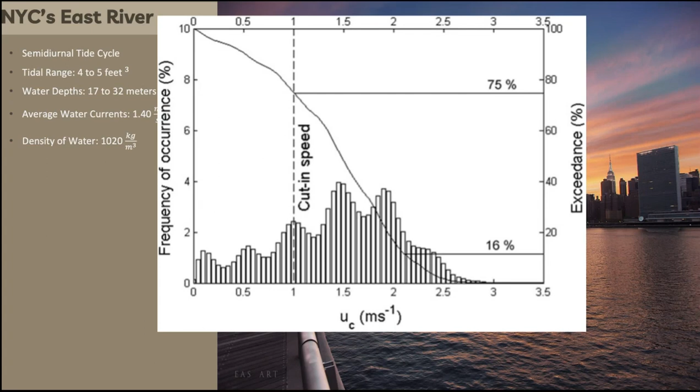The purpose of this project was to design a horizontal axis marine turbine that can operate in New York City's East River while providing sufficient power to the residents on Roosevelt Island. Roosevelt Island is a 1.5-mile long and 1/8 mile wide island that is part of the borough of Manhattan. The island has an average population of 11,722 and a total area of 147 acres.

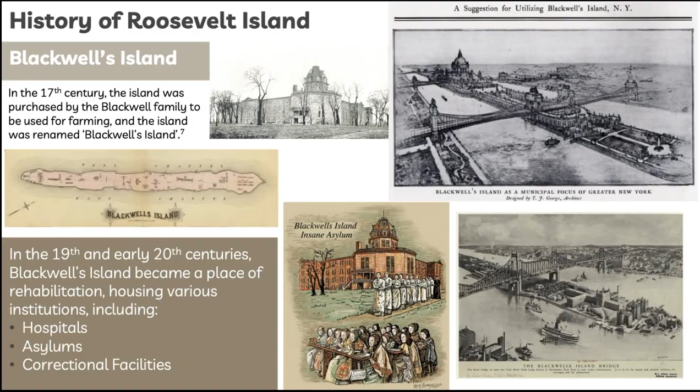In 1971, the island was renamed Roosevelt Island in honor of President Franklin D. Roosevelt. This was all part of a larger plan to revitalize the island and to improve its image. The plan was to start distancing the island from its earlier associations with institutions like prisons and asylums.

The plan included provisions for housing, parks, transportation, and infrastructure. One of the primary goals of the revitalization plan was to create a mixed-income residential community on the island by constructing new apartment buildings and renovating existing structures to accommodate a diverse population. Overall, the revitalization plan aimed to create a more livable and sustainable community for its residents.

Roosevelt Island's history is considered a place of care and rehabilitation, which is reflected in the architecturally significant landmarks still located on Roosevelt Island today. Roosevelt Island today contains a mixture of residential, commercial, institutional, and greenery spaces, and it is home to a diverse community of residents, including families, students, and professionals.

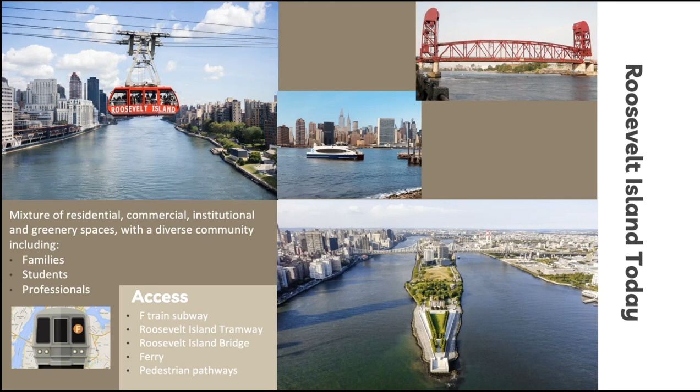The island is accessible via the F-Train subway, the Roosevelt Island Tramway, the Roosevelt Island Bridge, ferries, or pedestrian pathways for walking and biking. Con Edison is the current and dominant electric utility company that provides power to all 5 boroughs in New York City. Only about half of New York City's electricity is provided from outside of the city, and the remaining must be provided within the 5 boroughs.

New York City currently relies on 24 in-city power plants that run on natural gas or fuel oil, with the majority of them having been built over 40 to 50 years ago. Since the average Manhattan resident uses about 600 kilowatt hours of electricity per month, and the average population on Roosevelt Island is 11,722, the average monthly electricity usage on Roosevelt Island was assumed to be around 7,000 megawatt hours per month.

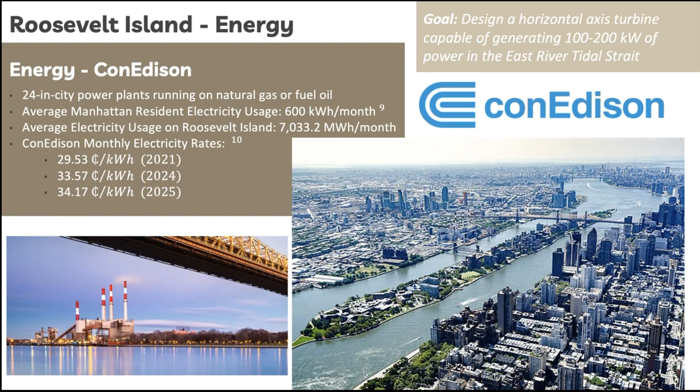Con Edison's average monthly electricity rate for a New York City resident was determined to be 29.53 cents per kilowatt hour in 2021, currently 33.57 cents per kilowatt hour in 2024, and it is projected to be 34.17 cents per kilowatt hour in 2025. The goal for these projects was to design a horizontal axis turbine capable of generating 100 to 200 kilowatts of power in the East River tidal strait.

Verdant Power is a marine renewable energy company that developed the first tidal energy project in the United States off of Roosevelt Island in New York City's East River. The Roosevelt Island Tidal Energy Project, or the RITE Project, was implemented in multiple phases, each of which involved the deployment of additional turbines and infrastructure, which allowed for incremental testing and optimization of the tidal energy system.

The project conducted multiple assessments to study the tidal currents and to measure water levels, current speeds, tidal patterns, and the effects on the environment. The results from these tests were very helpful when designing the turbine system for this course. In their final phase, Verdant developed an improved version of the turbines to be used at the project site, which are shown in the pictures on the screen.

The turbines were the 5th generation free flow kinetic hydropower system, or Gen 5 FFS, which were designed with the goal of extending service life, minimizing on-water maintenance work, and to reduce assembly and maintenance costs. The turbines had a rotor diameter of 16.4 feet, with 3 blades rotating at approximately 40 RPM. Verdant's turbines were also capable of switching direction with the current, rotating so that they can generate maximum power no matter which direction the river is flowing.

The Verdant tri-frame mounting system is a single triangular frame mount that supports 3 turbines at once onto the riverbed and requires no civil works on the riverbed. The mount was designed to simplify the deployment and retrieval process during installation and maintenance, which allowed for the reduction in timeline and costs. The RITE project operated for 9 months, and as of December 2021, Verdant Power's RITE project was no longer in operation, as the project license expired and the system was decommissioned and all infrastructure was removed.

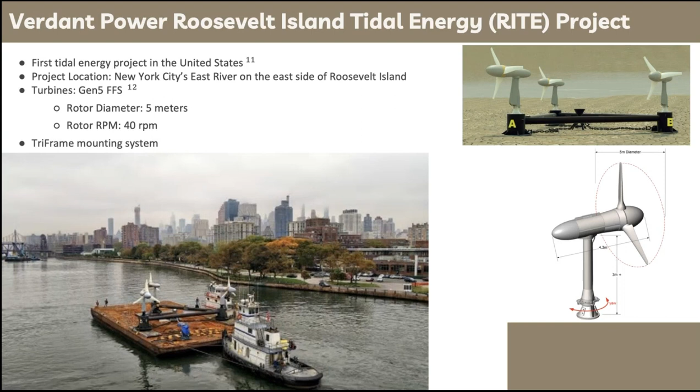The goal for this course focused on the optimization of the previous RITE project. The RITE project and its tidal energy system were considered as the starting point for this overall course project and was an extremely beneficial reference for this course.

The turbine design for this course had a rotor diameter of 8.4 meters and a blade cross-section utilizing the NACA 4415 airfoil. The dual rotor turbine utilized a 2-bladed rotor and was designed for a rated velocity of 2.5 meters per second and a rated power of 2 megawatts. The turbines would be installed on the west side of Roosevelt Island in the East River, with a minimum river depth of 17 meters and a hub height of 6 meters. Plots of chord and twist versus radial location are shown on the right side of the screen.

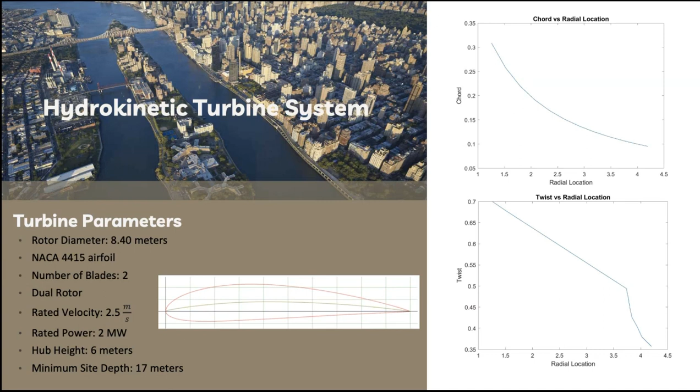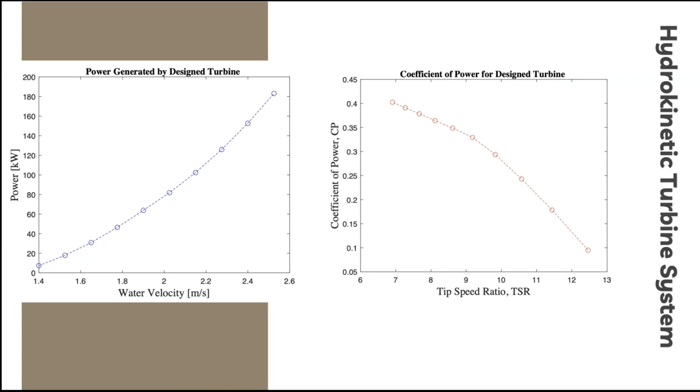This slide shows a plot of power generated by the design turbine versus water velocity in the East River on the left side of the screen, and a plot of the coefficient of power for the design turbine versus tip speed ratios on the right side of the screen. Here, this plot shows the power output for the design turbine, taking into account the water velocity variation per day in New York City's East River.

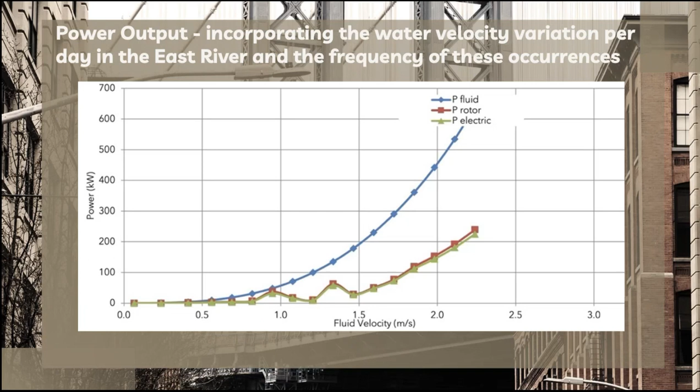The rated capacity for one turbine was 2 megawatts, with an annual power output of 387 megawatt hours per year, equivalent to powering 53 residents on Roosevelt Island. A hydrokinetic turbine farm utilizing 10 of the design turbines for a total rated capacity of 20 megawatts had an annual power output of 3,874 megawatt hours per year, equivalent to powering 538 residents on Roosevelt Island.

For reference, Verdant Power's tri-frame and 3 of their Gen 5 FFS turbines were installed in New York City's East River. The system had a total rated capacity of 210 kilowatts, or 70 kilowatts per turbine. The system was installed in the East River for approximately 9 months and was capable of generating 312 megawatt hours of electricity.

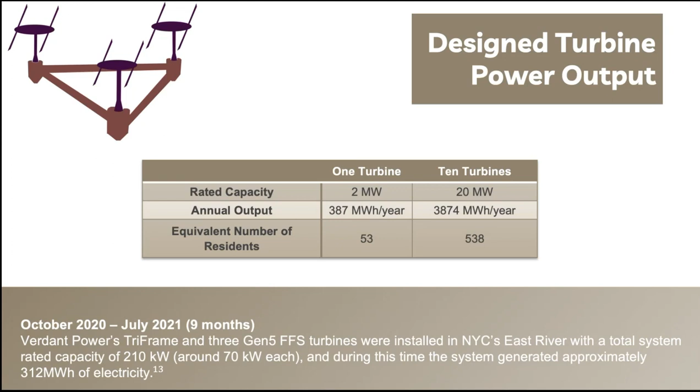As discussed in the previous slide, a hydrokinetic turbine farm utilizing 10 of the designed turbines produced an annual power output of 3,874 megawatt hours per year, equivalent to powering 538 residents on Roosevelt Island. The design turbine system will aim to provide power to the Octagon, which is an apartment building on Roosevelt Island. The building was originally the New York City Mental Health Asylum back when the island was known as Blackwell's Island. Later, the building was incorporated into the Metropolitan Hospital, which was then closed and abandoned in 1955.

The building was restored and renovated in 2006 as a lobby entrance for 2 adjacent apartment buildings on Roosevelt Island, now known as the Octagon. The Octagon has 500 units, which houses approximately 735 people. The design turbine farm would be capable of powering 73% of the residents in this apartment building, but since the building already has solar panels that are used to power a portion of the building, the design turbine farm could complete the power requirements for the Octagon apartment building.

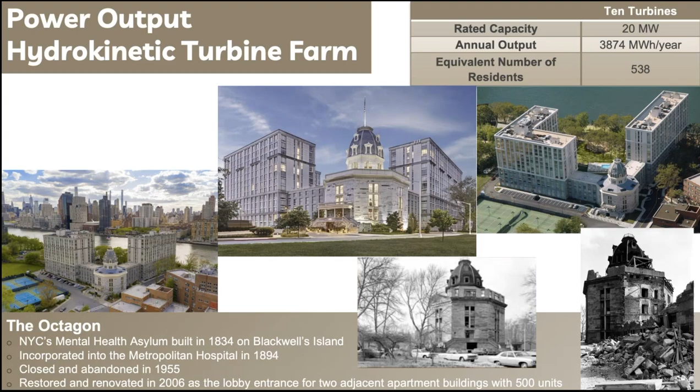Overall, New York City's East River is a viable location for a tidal energy project, as proved by the results of this project and the Verdant Power Roosevelt Island Tidal Energy Project, although there are still several disadvantages with tidal power production that need to be addressed before tidal energy can reach its full potential. The largest barrier to tidal energy is the high costs associated with constructing tidal power stations, including the costs of installing and maintaining the turbines and other infrastructure, and the high capital costs.

The mounting system for the hydrokinetic turbines utilized the Verdant tri-frame mount, which is capable of installing and retrieving 3 turbines and their mounting systems simultaneously. This helped to drastically decrease the costs associated with the entire turbine system. The system capital expenditure and the system operating expenses for operating 1 and 10 turbines is shown in the table on the screen. The system capital expenditure for 1 turbine was 693.6 cents per kilowatt hour in 2024 US dollars. The system capital expenditure for 10 turbines was 161.7 cents per kilowatt hour.

System operating expenses for 1 turbine was 486.4 cents per kilowatt hour, and for 10 turbines, it was 96.8 cents per kilowatt hour. The levelized cost of energy was determined to be 1,180 cents per kilowatt hour when designing for 1 turbine, and 259 cents per kilowatt hour when designing for a hydrokinetic turbine farm utilizing 10 of these designed turbines. Compared to Con Edison's standard electricity rate in Manhattan, which was 33.57 cents per kilowatt hour as of February 2024, the designed hydrokinetic turbine farm would increase the standard cost of energy for a typical Manhattan resident.

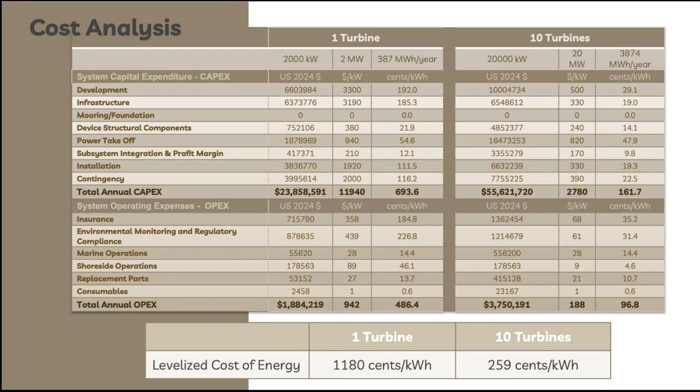When designing a tidal energy project, it is important to study the public policy issues, including costs and environmental effects of installing and operating tidal power systems, environmental concerns, and zoning requirements. One of the main concerns with tidal energy is the potential negative effects it can have on marine life. Construction activities may disturb marine ecosystems, and the noise generated by turbines creates a cause for concern, as this may negatively impact marine life, including fish and other marine mammals.

A major concern raised by environmentalists in response to tidal power is the effect on aquatic animals and plants. As turbines spin, it is a concern for fish and other sea life, as they could swim into the blades, which may potentially lead to serious injury or death. Since tidal power involves installing hydropower turbines underwater, there could also be issues with corrosion or biofouling, so it is important to carefully select the project site and the materials used.

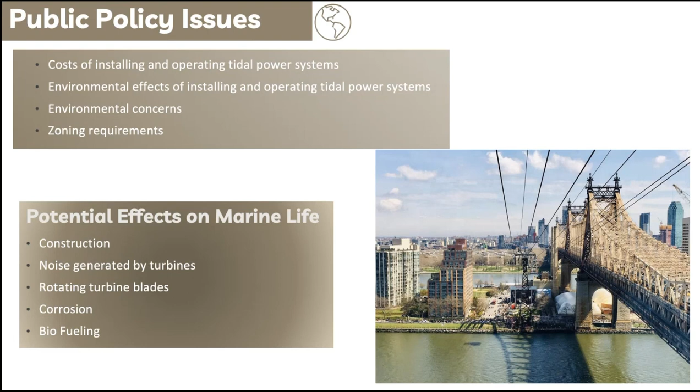The Army Corps of Engineers regulates activities in navigable waters and issues permits under Section 10 of the Rivers and Harbors Act and Section 404 of the Clean Water Act for structures, dredging, and fill activities associated with hydrokinetic projects. USACE evaluates permit applications to ensure compliance with environmental laws and regulations, including impacts on water quality, aquatic habitats, and navigation.

The National Oceanic and Atmospheric Administration's National Marine Fisheries Service and Office of National Marine Sanctuaries provide guidance on the potential impacts of hydrokinetic projects on marine species and habitats. They may issue permits under the Marine Mammal Protection Act and Endangered Species Act for activities that may affect protected species. The Environmental Protection Agency provides regulatory oversight of water quality standards and pollution control under the Clean Water Act, ensuring that hydrokinetic projects do not degrade water quality or harm aquatic ecosystems.

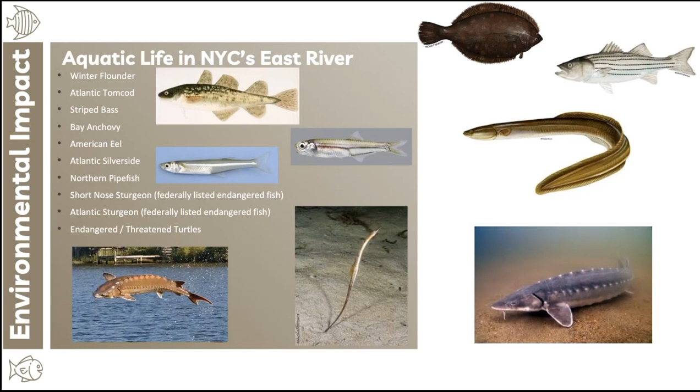As part of its first ever FERC pilot license approval process, Verdant Power passed a rigorous environmental impact assessment process. Through this, including the approval from over 20 renewable resource agencies and environmental groups, Verdant Power demonstrated that the rotation of their turbine blades did not affect fish, birds, or animals that swim in New York City's East River. Observations concluded that the majority of the aquatic fauna avoided the tidal power turbines during their assessment process.

Since 2006, Verdant Power has been analyzing the effects of installing a tidal powered turbine system in New York City's East River. The biological assessment for the RITE project rated the probability for interaction with these endangered fish and turtles to be relatively low. During their Phase 2 trial period, Verdant proved that their tidal turbines do not injure fish. Analysts did not observe a single instance of fish or other species being struck by a turbine blade.

This is due to the fact that the turbine blades move slowly enough for fish to swim through them, though the trial period showed that fish generally avoided the turbines altogether. The baseline assessment and post-installation monitoring for the RITE project demonstrated that the underwater ambient and turbine noise would not cause behavioral reactions or injury to marine life. Additionally, pre- and post-deployment studies at the RITE project found that noise generated by the turbines will likely be audible to the fish in the East River, but would not cause them any injury.

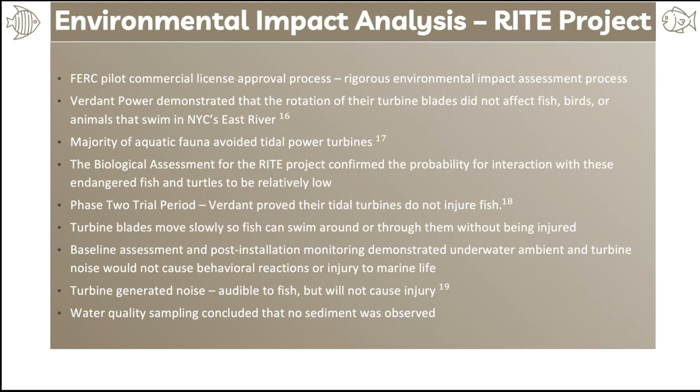At the end of its operational life, a tidal energy system will be decommissioned. Decommissioning the device's cables is considered to have a greater effect as it would involve removal of structure that could have been used by resident fishes for habitats. Potential environmental effects from decommissioning a tidal energy device include increased noise, habitat disturbance, sediment disturbance, chemical contamination, marine debris, temporary turbulence, and surface traffic. The negative effects that come with decommissioning a tidal energy device were vastly reduced with the use of the tri-frame mount, as 3 turbines are connected through the mount, all of which could be removed from the site simultaneously.

The purpose of this course was to design a hydrokinetic turbine system in New York City's East River with the goal of providing power to the residents on Roosevelt Island. The designed 2-bladed dual rotor turbine had a rotor radius of 4.2 meters and operated at a rotor rotational rate of approximately 40 RPM. The turbine had a generator-rated capacity of 2 megawatts and was able to produce 387 megawatt-hours of energy per year. For a rotor to be capable of generating this much power, it must operate at a high rotational rate, which can potentially cause cavitation.

Rotors that rotate at excessively high rotational rates have the ability to cause water to form vapor bubbles that may implode. This is known as cavitation. Cavitation occurs in locations at which the local pressure over the airfoil is less than the vapor pressure. Cavitation occurred at all water velocities for the designed turbine, with the exception of 2.15 meters per second. Cavitation also consistently occurred at a radial location of 0.976 meters for the designed turbine.